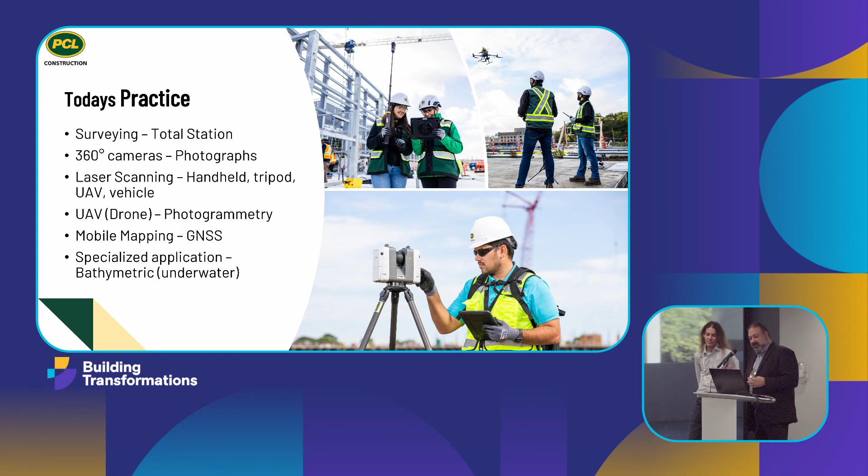So I'm going to go through a couple of case studies that are examples of PCL projects where we've used reality capture in multiple aspects and it's worked out very successfully. So the first example we're going to be talking about is Scotiabank Arena. The main focus of this project was capturing the existing conditions. So this is an existing building.

The challenge for us as a general contractor is to complete architectural, structural, mechanical, electrical renovations in multiple areas of an operating NHL, NBA, and concert venue. I'm sure none of us in this room have ever come across a situation where we've had to do work in an existing building and we don't have up-to-date, accurate as-built drawings, right? Never.

So that was one of the main challenges that we encountered, is that we didn't have accurate information on the building. So it's a large, complex building, a lot of unique services. We're talking about concourses, public space, kitchens, concessions, washrooms, team spaces, dressing rooms, restaurants, media areas, AV, sound areas, back of house services, things like that.

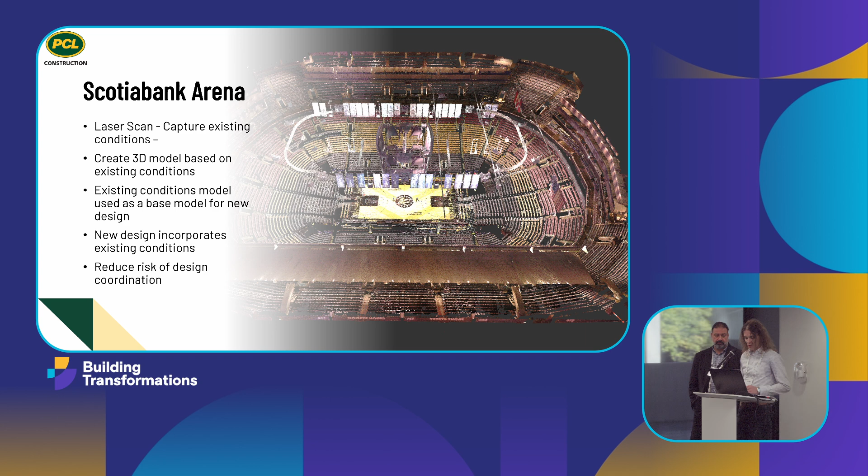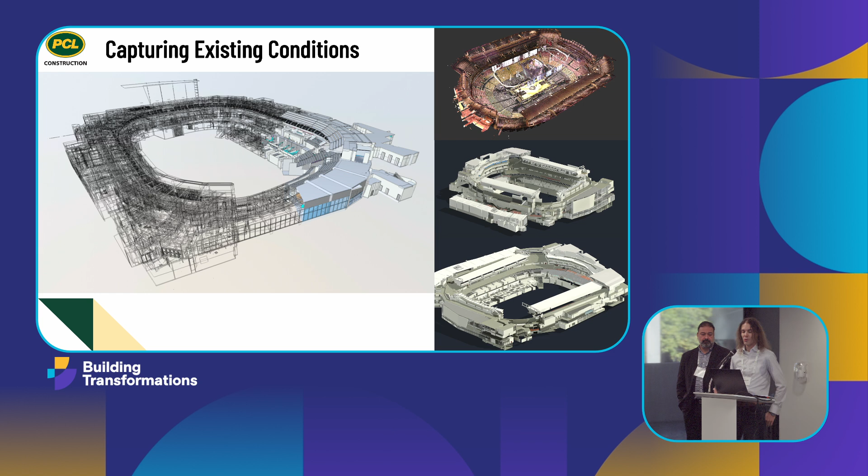So in summary, using reality capture allowed the project team to reduce the risk of design issues, any unknown or inaccurate site conditions, coordination issues, schedule changes, budget changes, things like that that would result from design issues during construction. So without this, the project would have encountered numerous design, coordination, and construction issues, which would result in redesign, which is going to have schedule and budget implications. So we were able to reduce those by capturing the existing conditions and using reality capture successfully.

So we're currently on phase 5 of this project. We've successfully completed 4 phases of laser scanning and modeling, and the feedback from our clients, consultants, design team, construction team on site has been that this has been a really valuable process in reducing risk. They've continued to request this service, and to put it simply, they've found that it works. So we've continued to do it.

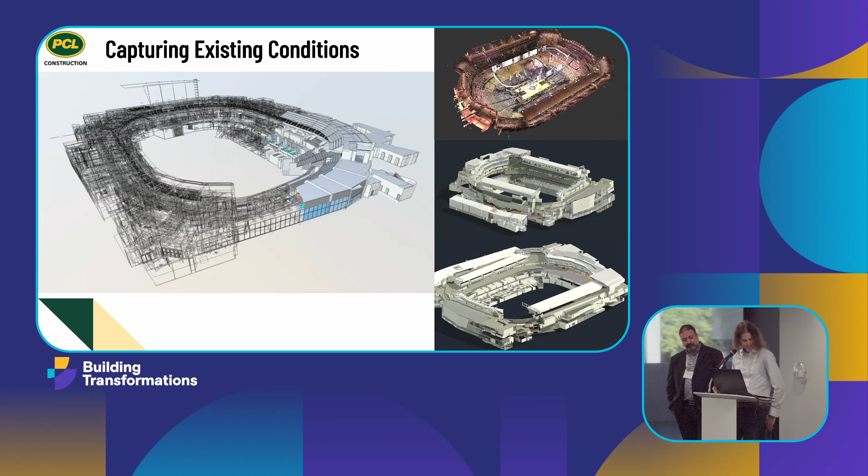The next example we're going to go through is the Rogers Centre. We used reality capture to perform a lot of site coordination on this project. Again, the challenge as the general contractor is to complete architectural, structural, mechanical, and electrical renovations to multiple areas of an operating MLB stadium. Transforming the existing level 200 TD club behind home plate into an exclusive platinum club. Renovation scope includes construction of new stadia, premium seating, bars, kitchens, washrooms, dedicated exterior entrance, and a complete exterior patio building.

So being a complex existing building, with multiple renovations and updates over the years, here we were again faced with the challenge of, you guessed it, inaccurate as-built drawings. So again, we used reality capture, specifically laser scanning, to quickly and accurately capture the existing conditions and incorporate those conditions into the new design. This helped limit the risk and schedule impacts by reducing the unknown or inaccurate site conditions.

So how did we do this, and what process did we follow? Similarly, we did laser scanning on site. We captured the existing conditions. That includes above ceiling mechanical and electrical services. So our scope of work included scanning level 100 and 200 concourse areas, 13 sections of seating, concessions, kitchens, team stores, washrooms, and back-end spaces.

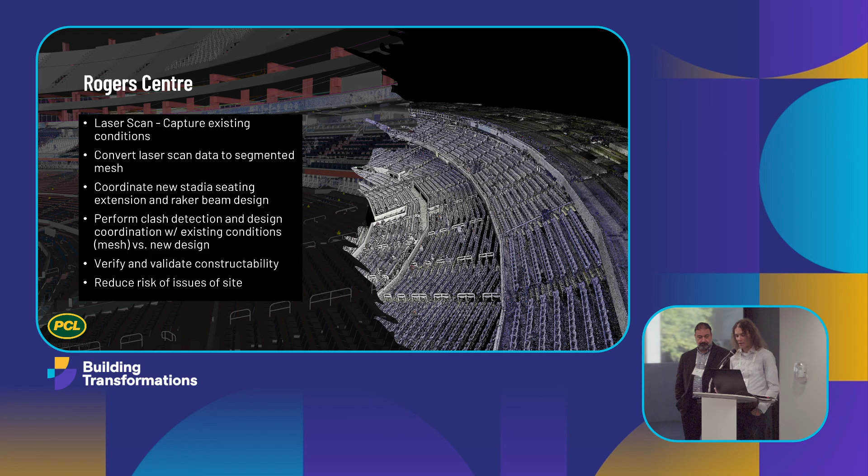So we were able to use the existing condition scan data to coordinate the new stadia seating extensions, the raker beam design, as well as verify and validate the new design. So comparing that with the shop drawings that we had got, making sure that everything's gonna fit prior to doing any construction. We performed weekly architectural, structural, and mechanical system clash coordination meetings, reviewing it with the design team and consultant to identify any issues between the existing conditions and the new design, which resulted in catching various issues between different MEP services, identifying ceiling height issues, things like that, before any construction started.

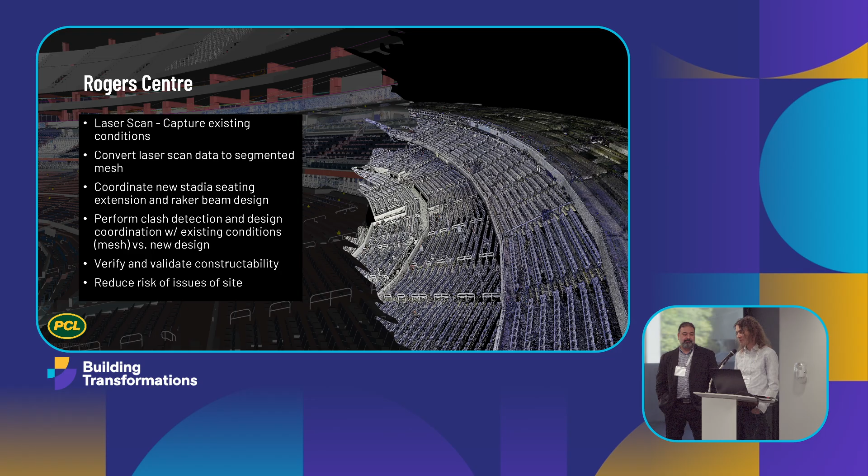So again, it's reducing the risk of coordination and construction issues on site. So we're able to use the scan data to measure the existing conditions, verify and validate constructability. We're able to confirm and verify the new ceiling heights while incorporating the existing conditions. And now that we have a fully coordinated design, we're basically just waiting for the Jays to win the World Series so that we can start construction on the project.

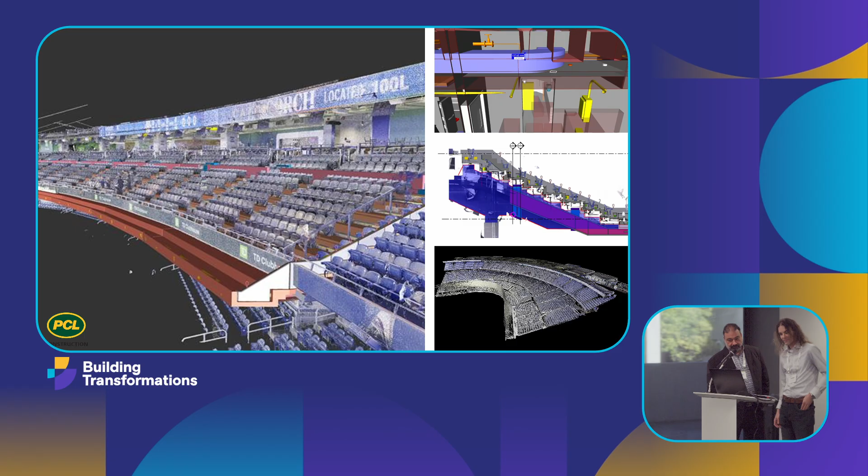Okay, so before we continue, I hope we did a good job depicting what we did through the project. And the reason why I say that is some of our team members are here, right? Like Jessica, Darshana, Cindy were a big part of this project. So they're here to make sure that we're in check and we're saying the right things before we commit to anything.

But moving on to another large scale project, East Harbour. At East Harbour, what we did was we looked at UAVs as a solution, so using drones. It's a 3.5 acre piece of land. There's a lot of existing abandoned buildings. The buildings have a lot of history, so there is some sensitivity behind them.

We were tasked to remove the utilities and put in the new utility systems, underground services for the future condos that are going onto the site. One of the big ones was a water tower addition.

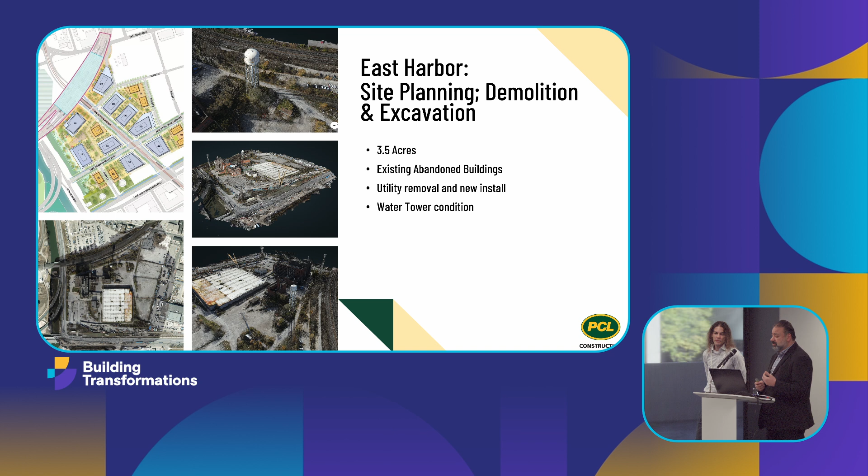So how did the UAV drones help us in this project? Well, one was through inspections, verifications of locations. What do we mean by that? By going out there, having the drone, having the photogrammetry, we're able to put it on a software platform. Our team is able to investigate and locate areas or maybe utilities, manholes before they go on site. It's a large site. It's like a needle in a haystack walking around trying to find all these.

They're able to determine where their locations are with georeferencing, right? So they have the coordinates. So it's very simple when they need to go out there on their tours and do their site visits. They know exactly where they need to go and locate these things. What that does is it increases efficiencies, right? And it also reduces the potential safety hazards that we might have walking around in a site that really hasn't been cleaned up. It's just one big mess, if you will.

We also use it for quantification. So with photogrammetry, we're able to pull quantities to determine some of the excavation we're going to do, and eventually, as we continue with the progress, the quantity of backfills. We did it for progress tracking, so putting in a platform where we're able to do sections in an area that we're excavating, and do weekly flights, bi-weekly flights, whatever we need to, or at milestones, and be able to determine how far we have excavated through the georeferencing and accurate measurements.

And eventually, one of the big things that we never encountered until the challenge was brought up is the water tower. The water tower was the one piece that the client was debating about: do we tear it down? Do we keep it? Do we retrofit it? Because of its heritage and its history. Well, what condition is this water tower in? Well, instead of having a crew climbing this tower and figuring it out, drones came into play for that.

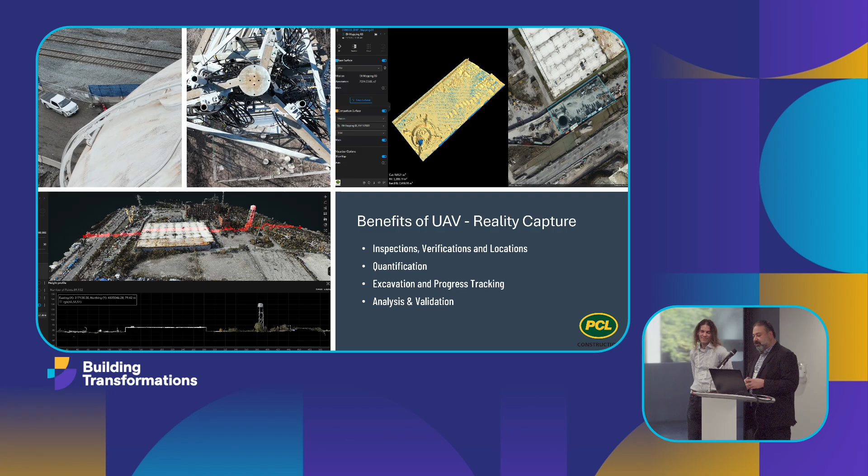So the last project we're going to talk about as a case study is an example of a heritage and restoration project that we used extensive reality capture on. The purpose of this, as we know, is that heritage projects typically require a higher level of documentation to document where things are at, being a heritage building. So this is an example of how we use reality capture to help mitigate risks on large complex heritage restoration projects.

So the example that we're going to be using was 4 buildings ranging from 10 to 24 stories, connected by a 2-story podium with some underground parking. Approximately 1.7 million square feet gross building area, a multi-year project involving basically restoring the entire exterior of the building, any heritage elements, demolishing all of the building interiors back to the base building and retrofitting it with new mechanical, electrical, and architectural finishes.

So like I was saying, heritage projects usually require special attention to documentation and preservation. So we chose to use laser scanning to document the existing conditions at the start of the project. And this helped our heritage consulting team as well, that we captured all this information and data, and they were able to use that to help determine what was going to be restored, how we're going to help protect some of this during construction. So it was a tool that our heritage consultant was able to use to supplement their site visits. They're able to review the information digitally.

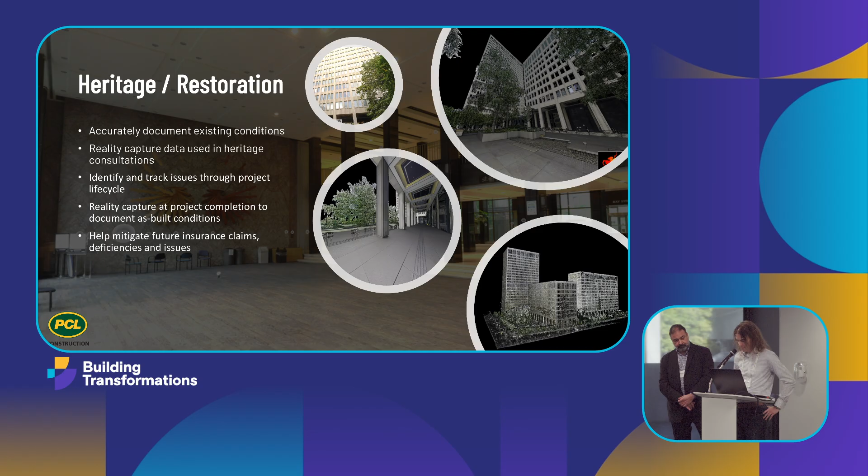So just having an extensive level of documentation on these heritage projects proved to be extremely valuable and useful in our case. So we've got a video here that kind of walks us through some more information on this.

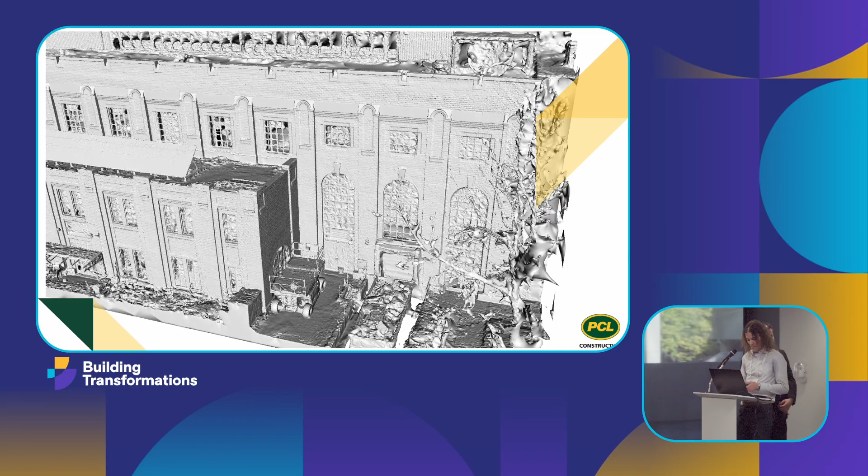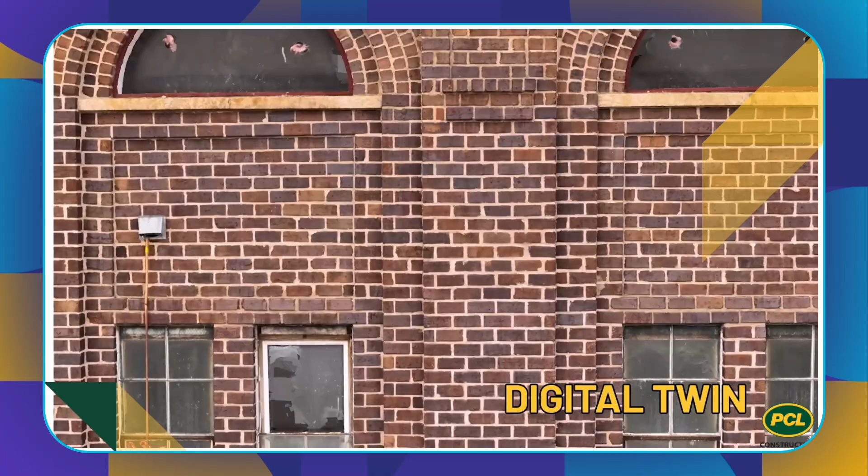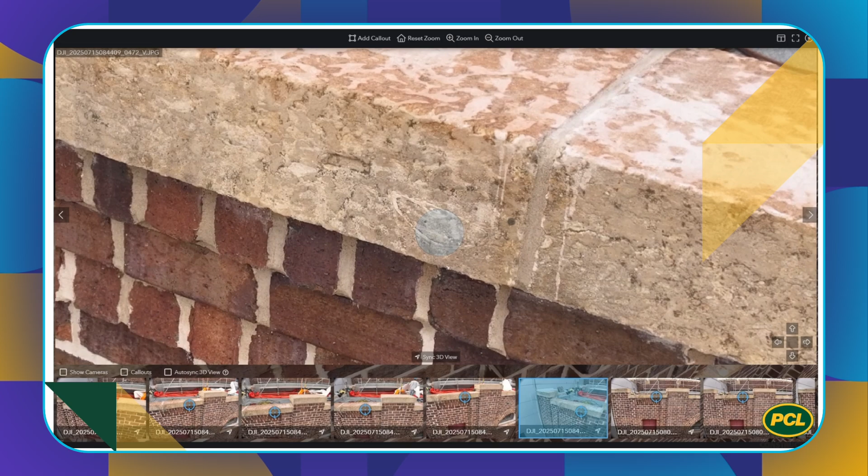PCL's virtual inspection workflow creates a 3D digital twin of a building exterior. These high-detail inspection models feature lifelike textures at dramatically higher resolutions than laser scans, making them ideal for visual identification of issues and defects. The virtual inspection process streamlines initial issue assessment, tracks repairs throughout the project lifecycle, and delivers a true-to-life exterior as-built model for future building operations.

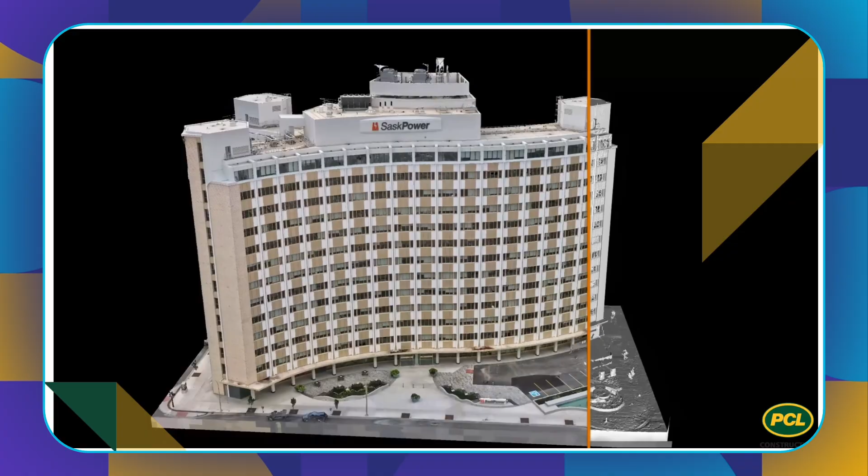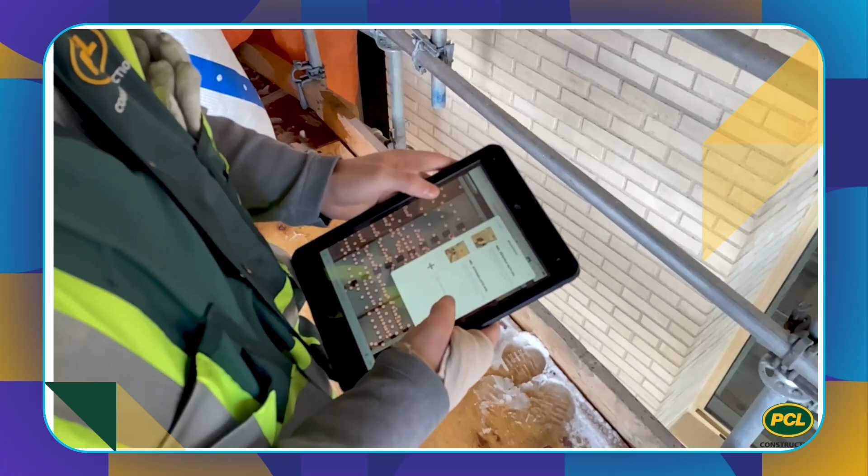Prior to full site mobilization, our in-house experts will conduct a high-resolution drone scan of the SaskPower exterior to create a photorealistic cloud model accessible to the entire team. The team will utilize the super high-resolution model to inspect, collaborate, track, and quantify repairs in advance of erecting scaffolding. Throughout the project, the team will collaborate using the virtual inspection model to discuss, document, and action exterior restoration work. After completion of exterior repairs, PCL will rescan the building and deliver an as-built facade model, providing SaskPower with a complete virtual snapshot of the building exterior.

So moving on, the last topic that I'm going to talk about is using reality capture for QA/QC verification. So there's a number of different examples we've got shown up here and numerous projects that we've used these types of things on, but using reality capture to verify construction tolerances, whether it be site grading, underground service installation, using a UAV, capturing rebar and in-slab mechanical and electrical services within a concrete slab prior to placing concrete in order to document where your rebar and in-slab services are, if there's future cutting or coring required. Can be done through laser scanning or through UAV.

Measuring concrete slabs, slab elevations, topography, what's happening with your concrete slabs. Are they flat? Are they not flat? Are there deviations? How much are those deviations? Looking at elevator shaft plumbness, making sure that our elevator shafts are vertical before your elevators show up on site, making sure that your construction tolerances are being met prior to things arriving on site and then not fitting.

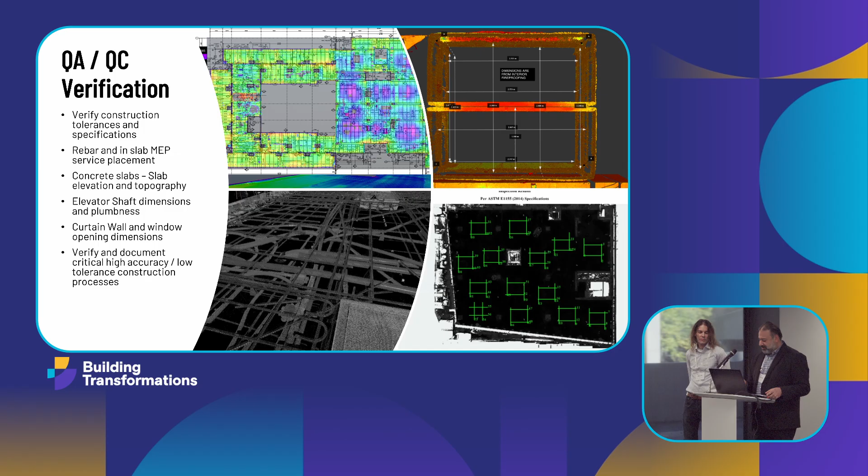So looking ahead, reality capture is positioned to play an increasingly vital role in construction, driven by advancements in automation, artificial intelligence, and integration with digital twins. Today's platforms offer partial automation and still rely heavily on skilled forces. So that is an upfront cost, which sometimes deters projects, teams, or companies from investing. The ongoing innovation is steadily addressing these barriers, though. So we are seeing improvements as we move forward.

AI, to me, is a fully automated solution, not a partially automated solution, right? A lot of vendors out there are claiming AI. Some of these products we've been using for 10, 15 years, and all of a sudden now they're AI, but they're performing the same task. So how did they all of a sudden become AI? So as an industry, we have to be cautious of what we want to accept as AI. We also have to realize that we need to back-check any information that comes out of an AI. We can't just blindly say, this is the solution.